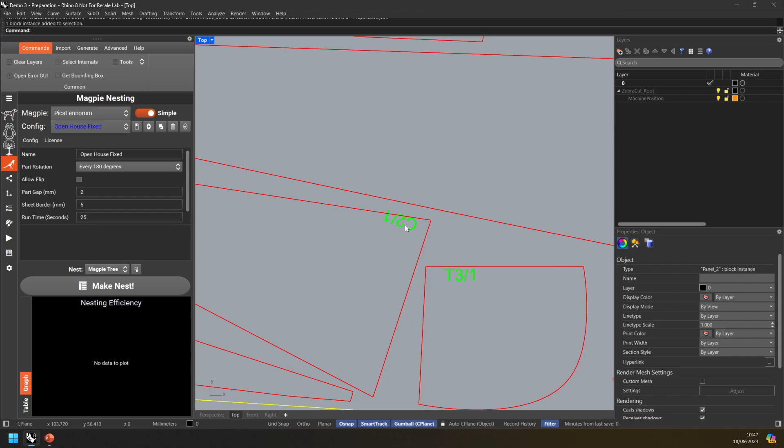However, there are a few issues with this file. We can't cut this immediately. You can see, for example, the text is overlapping the boundaries of the shape. You might spot that all of these are DXF block instances, so they're not curves, they're not geometry, so we can't cut those. And you can see everything is on the same layer, it's all on layer 0. So this file is not ready for cutting.

However, ZebraCut has a preparation system, and this is a whole series of different tools and steps that we have which help you to clean up your geometry. For example, removing duplicates, flattening geometry, fitting curves, and so forth.

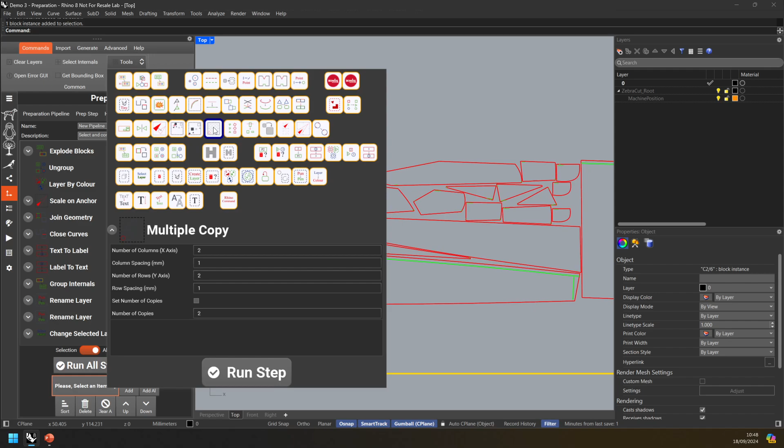What you would do is you can either use them individually, you can use them up here, you've got all of the different steps in here that you can run interactively, or we can prepare them into a list of steps that need to be run, and then we can run them as one single preparation pipeline, one preparation list.

So I've prepared this little pipeline. It took me maybe 10 to 15 minutes just to figure out what steps were required. And then once that's done, I can always prepare these files instantaneously.

So if I just work through them, we'll run the steps one by one, and I'll just talk you through what's happening. So the first problem is that these are block instances in DXF. That means we can't edit them, we can't change them, we can't separate them into multiple layers.

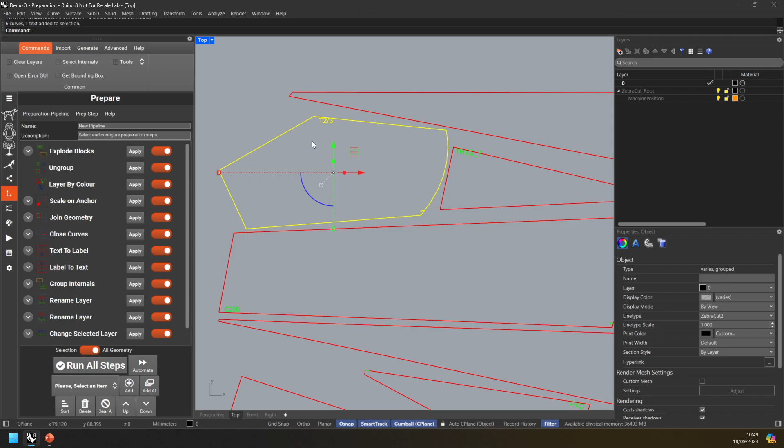So we'll first of all explode the blocks. Let's delete 25 block definitions. Next, you'll see all the geometry is grouped, so we need to ungroup it. So we'll run an ungroup, 25 blocks ungrouped.

Next thing we need to do is put things into the right layers, because we've only got one layer at the moment. So we're going to use layer by color, and that will create two new layers, spot lime and spot red. Apparently that is lime green. And there you can see our lime is our text and our pen marking, and red should be our knife cutting.

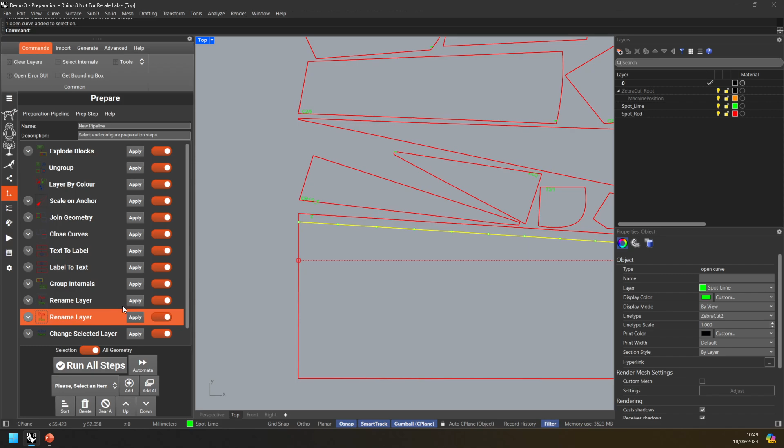So we can then do a bit of layer renaming later on. The next thing to spot is this file is very, very small. I think actually the file is in inches, and we are working in millimeters, so we just scale it by 25.4, which we can do, and then our parts become the correct sizes.

Next thing you'll need to spot is that this geometry is not joined. There's all individual lines, and we don't have closed contours. So let's do our joining of geometry. And we've now got nice closed curves that we can work with.

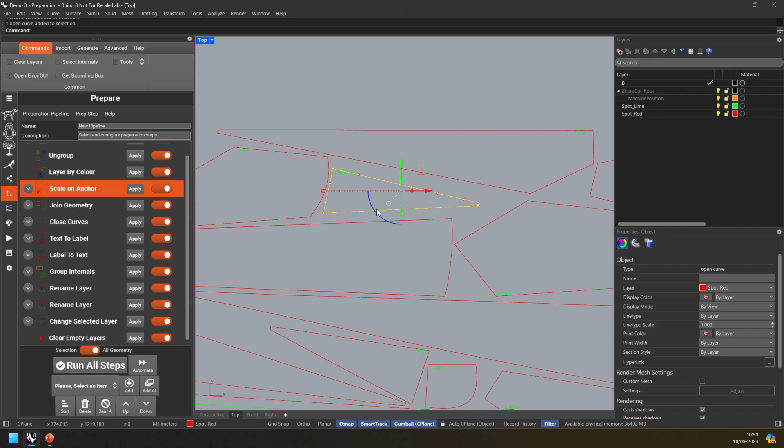Not all of them, I think, joined. I think one of them didn't join. So we'll just do a little bit of closed curves, and that will just reduce the number, make sure everything is closed as well. It's just going to tighten up. If they don't quite meet around the edges, so we'll just close them up together.

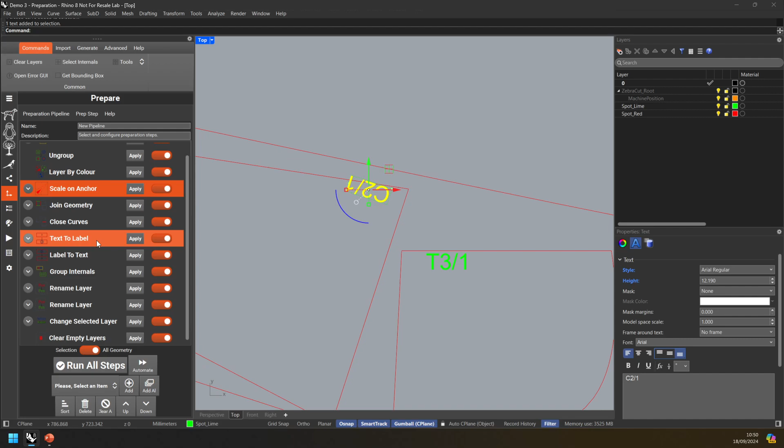Now to deal with this text, so what I'm going to do is use a function called labels in ZebraCut. I'm going to convert all of our text into labels, and you'll see these are now text dots in Rhino from being text. They're much more readable, much more easy to work with, but we also have this functionality here that we can then place them.

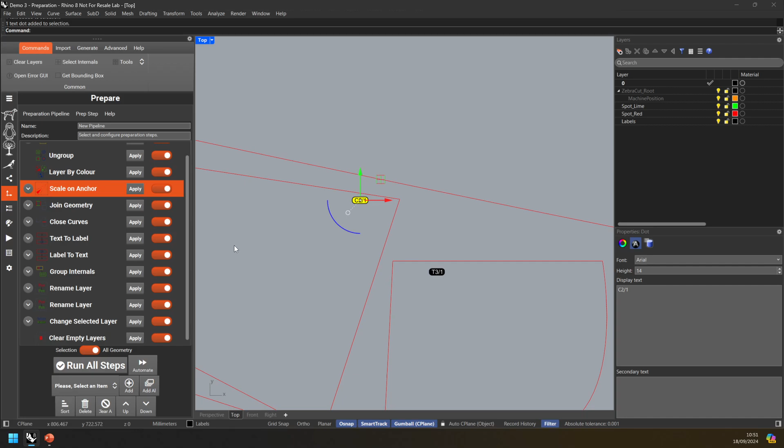We can take labels and make them into text, and when it does that, it will place the text appropriately within the parts. So for example, it will try and avoid putting your text over the edge of the shape, and it will make sure it fits, and it won't put it over any pen marks, and we can run that now. So there we go, it's done that, and it's placed all of the text nicely within the shapes.

So they're all nicely clear of any other geometry, of any notches or any other text or pen marks. So that's all ready to go. And it's still text, we can still run with that.

Finally then, we want to be able to just group this geometry, so group internals, so that we can treat these as individual parts and move them around if we needed to. We might want to adjust the nesting manually, for example.

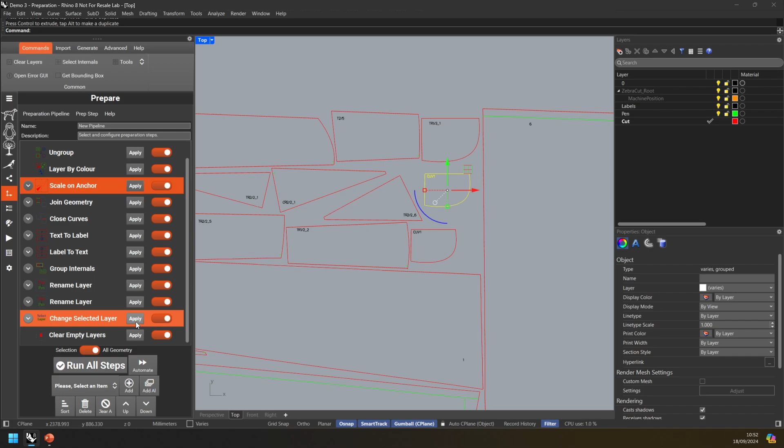And then finally we'll do a little bit of layer renaming, so we'll make the lime green one the pen layer, we'll rename the red to be the cut layer, I'll change the selected layer to be cut, and then I will clear the empty layers, which just takes off that layer 0 we're not using. And now that should be ready to cut.

Now I'll just go back and show you that running in sports car mode, and I'll just open that DXF again. So there's your DXF open, and I'll just load up the correct pipeline for this one, which is here.

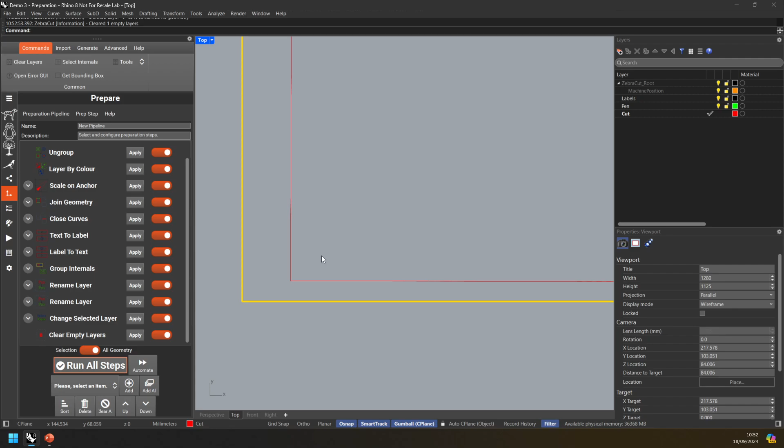And then again, if you're an operator, if you're going to cut these files, you don't need to worry about all of these steps. They can be pre-prepared by the CAD team, and indeed we can help you set these pipelines up. But if you're the operator, you just come in and you say run all steps, and your geometry is pre-prepared automatically. That's all done, all those steps have happened, everything is ready for cutting.

You can then make sure you've got tools aligned, so we might want to, for example, laser cut, and we might want to inkjet the pen marking and the labels. And we can then go ahead and do a preview, and that's all ready then to send down to your machine.

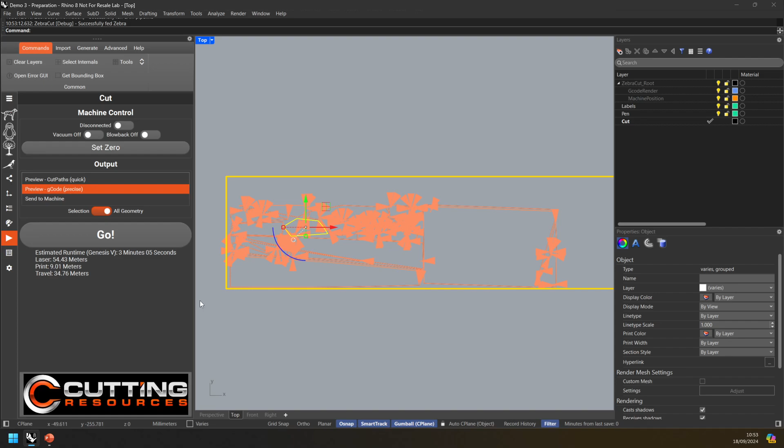So a bit of a demo for both groups there. You've got the ability to deal with all of the different variation in your files using ZebraCut, but also that can be automated and can happen instantaneously for you to actually be productive.